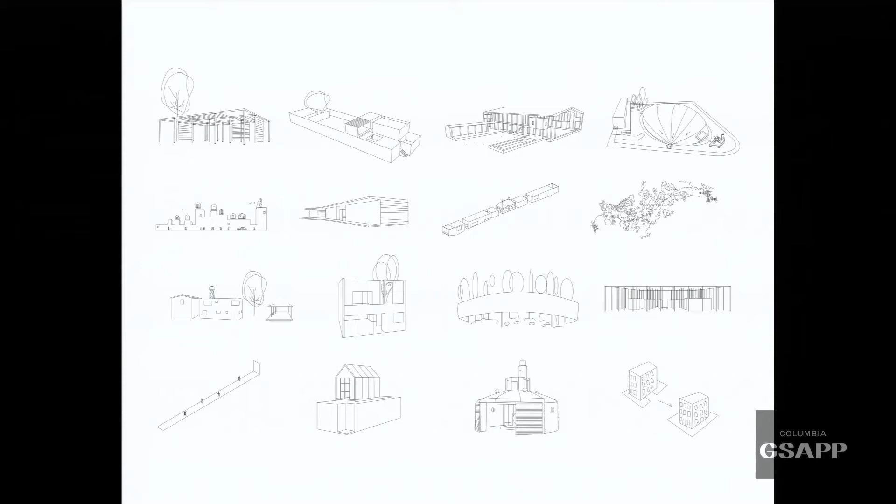Placemaking is not a product, but a process. By approaching design as a process, we seek our content in context. We make sure the species of spaces we build provide us a sense of wholesomeness and sensibility on every scale, whether they are public, private, industrial, or domestic.

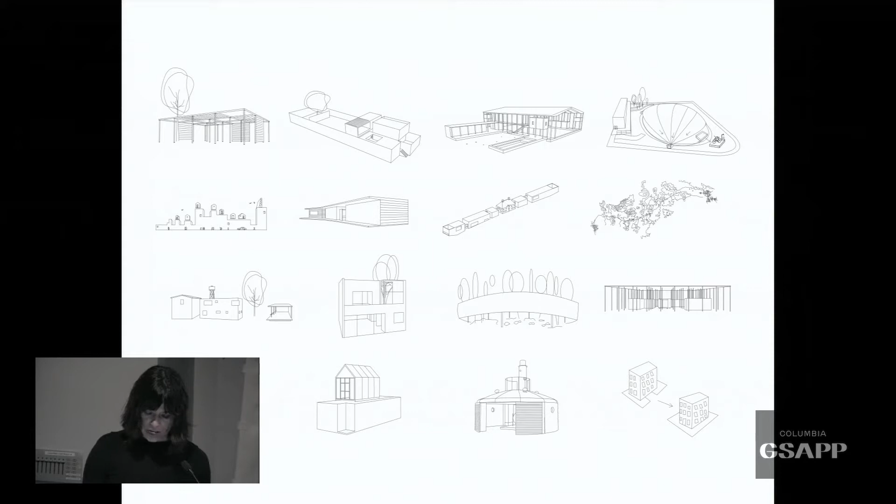There are three aspects in my design that contribute to placemaking: habitability, ecotone, cross-programming. Each of the 9 projects I'll present to you today merge in some measure all 3 aspects of placemaking, but some illustrate more clearly the specific features behind these concepts.

The first aspect of placemaking is habitability. Habitability is the capacity of space to welcome and engage people at the human scale in everyday routines. It is intimately linked to the atmospheres generated by choice and use of construction materials and design proportions. Habitability in design is what makes a space thoughtful.

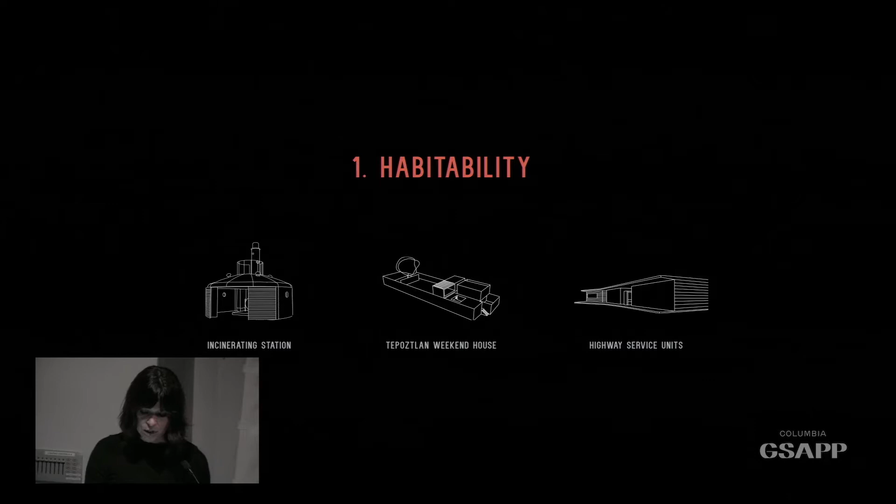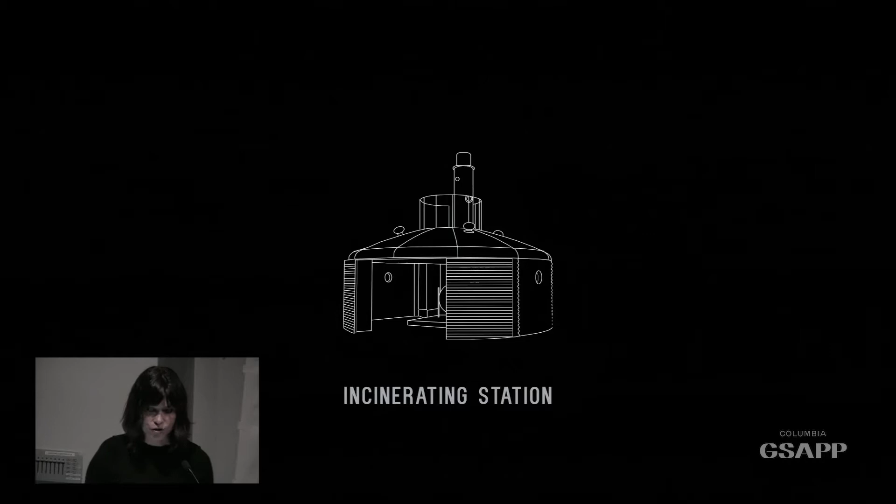For instance, we recently designed and built the incinerating stations, which houses the furnaces for solid waste combustion in Mexican national ports and airports. Our research for the prototype sought out the most functional form and construction material.

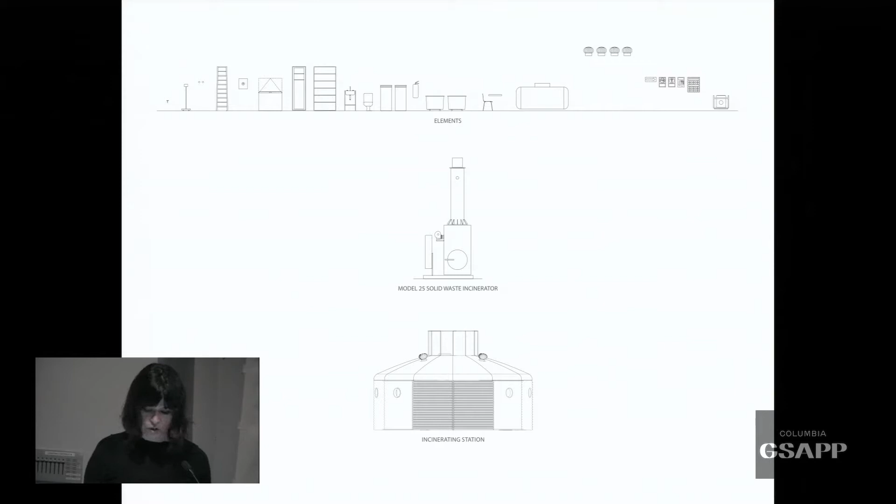So we drew all the elements that had to be inside the station, added the incinerating machine, and realized that a circular plan was the best way to do it. This enclosing spatial arrangement efficiently deployed the operator's program around the incinerating machine.

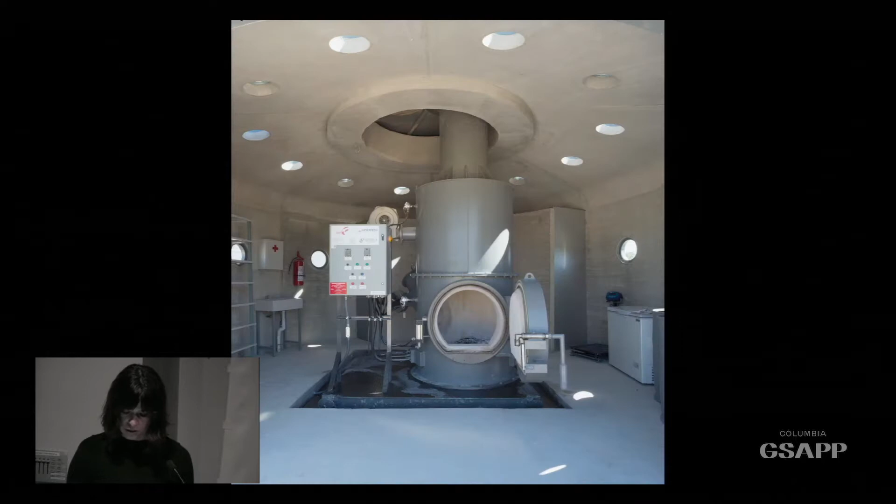Besides making tasks orderly, it radically transformed the way these facilities used to operate. Finding an adequate name for the project was integral to the conceptual design process. The term station evokes the replicability and tidiness of a space lab and the logistical movement around a train station.

We took into account corrosion, extreme temperature, security, exportability, and user comfort. The main challenge was that the client wanted ready-made parts, as in a prefabricated home, which would adapt to a wide range of climates: a jungle, a desert, an ocean.

The walls and roof of the station, in fact, can be set up in a couple of days. For this, we had to create a unique type of folded concrete that is durable, malleable, and requires nearly no maintenance. Although ready-made, the prototype was flexible enough to become adjusted and improved to different conditions.

The station becomes a habitable machine that in its round arrangement not only houses an agreeable workspace, but creates a meaningful relationship between the operator and his work. We have already built 10, and we're building 7 more.

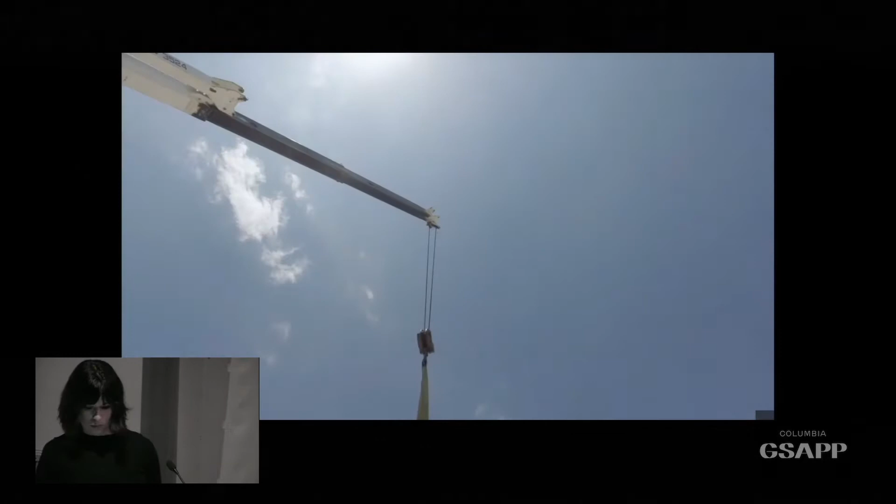So now I will show you a video about the construction process. I think there's no volume.

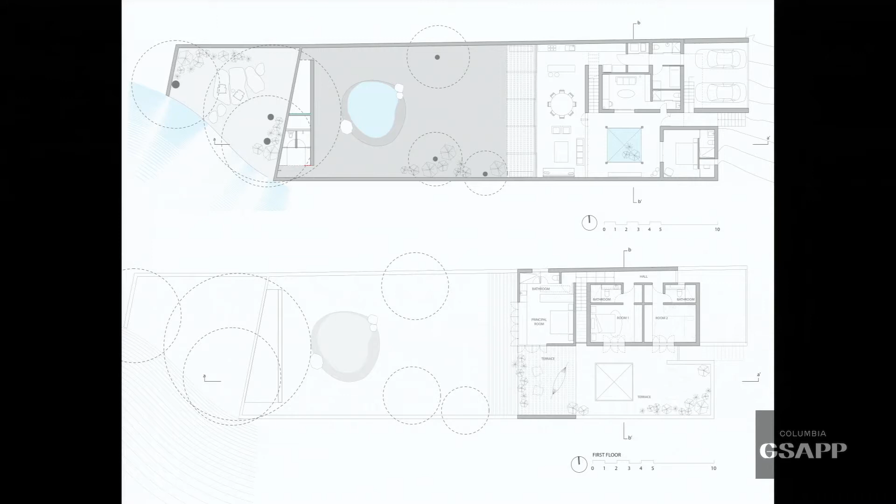This is the plan of the house. It's a 3,500 square foot house. It's in a very small terrain, but with a compact program, it has five rooms that you can inhabit.

So even if it's a small house, there's a lot of program in it. The main challenge was to give a sense of amplitude and variation in a rather small terrain, so that each space offers something singular.

The place can be experienced as a grand terrace with a luscious garden. The boundaries between open spaces and enclosures conflate in multiple fluctuations. The house subtly appeals to the user's perception. The emphasis is on hues and textures.

There's extraordinary craftsmanship in the use of materials. Its variety of atmospheres is achieved with different heights, using large windows and sliding doors that not only contrast narrow and expanded areas, but also allow the coexistence of interior and exterior spaces while maintaining visual depth.

Every element is manufactured to the scale and specific dimensions of the house: kitchen, bathrooms, closets, windows, railings, doors, vegetation. We design permanent furniture to the last detail and purchase some of the interior decoration. At times, you cannot really tell if you're inside or outside. Room divisions in different combinations transform space into one or the other.

Despite its austere design, the home's crafted blend of elements gives an air of fulfillment. All of the interior and exterior elements interweave in a harmonious whole that sustains a state of contemplation. The clients have felt at home in such a way that they're considering moving to their weekend house to inhabit it more permanently. So habitability is not solely about sheltering our daily habits, but also nourishing meaning and a pleasant state of well-being.

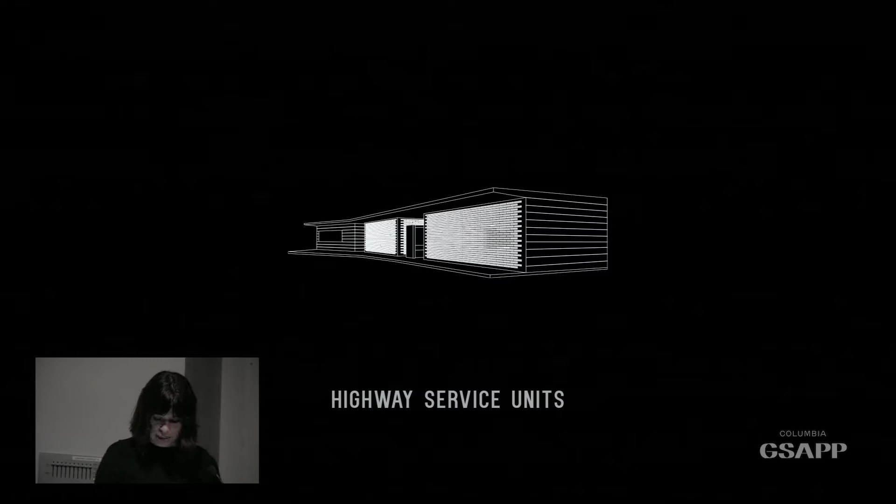The next and last project of the first theme of habitability is the highway service units. Habitability implies promoting a dignified use of space regardless of its function. But how do we achieve this with a public restroom? As you can imagine, it's particularly challenging to change the gruesome image people have of a restroom.

But in truth, this is a design problem. If public restrooms are cramped, dark, damp, and smelly, it's because they aren't given their due place. Our client asked for an exportable model of highway facility units that provided low-cost, sustainable public infrastructure along the Mexico-Morelia Road. Their program comprised restrooms, phone booths, and a convenience store. The main achievement of this project was transforming, through design, the negative perception users had of roadside services by offering safe, ventilated, pleasant resting areas integrated into the natural landscape.

The use of a frontal concrete lattice gave character to the facility units and made them noticeable to the traveler. The lattice efficiently cross-ventilated the restrooms, but also organically integrated the units into the landscape. To lower costs, our design approach experimented with different uses of one material. In this case, we resignified concrete to produce an attractive effect.

The use of light was also crucial. During the nighttime, the illuminated lattice creates a safe, warm, and welcoming atmosphere, and during daytime, an organic, clean resting site. The greatest achievement of the highway service units is that their simple and appealing design has made them sustainable and kept them in optimum conditions over time.

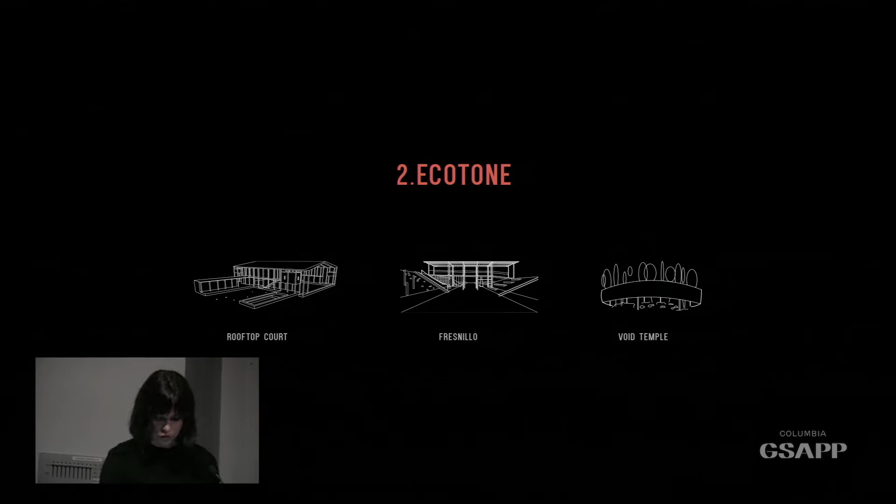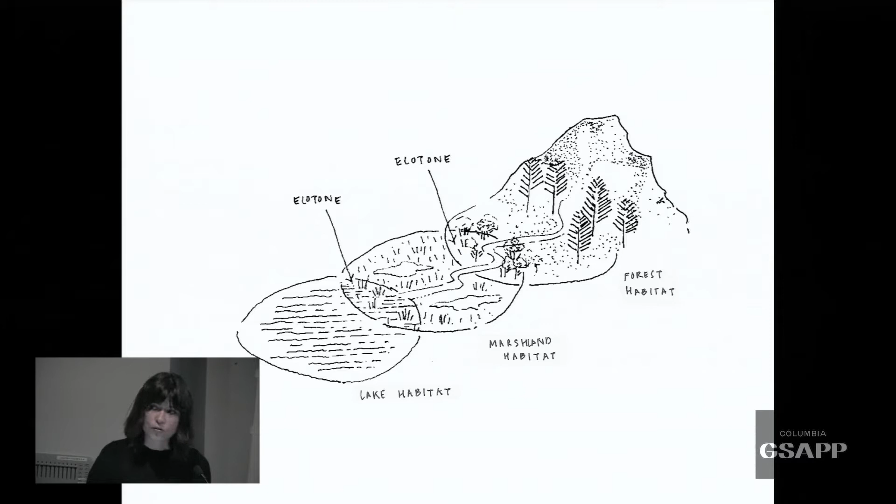The second aspect of placemaking is envisioning public space as an ecotone of cultural production. Biologically speaking, the ecotone is a transitional territory which modulates the tension arising between two distinct environments. In urban and architectural design, I understand the ecotone as a place that harmoniously merges the public and private sphere, tempers the move from open space to enclosures, and allows respectful coexistence of built-up and natural areas.

By activating public space effectively in housing blocks, we would be enabling a grassroots culture to emerge and shape community. But our greatest barrier has been convincing major stakeholders in the production of housing to invest in public space and social infrastructure.

In this suburban townhouse complex near the Gulf of Mexico, the developer asked our client, Infonavit, to build a rooftop to protect a basketball courtyard from the sun, heat, and rain. Realizing the lack of public space, we proposed instead a portico agora that fulfilled the program of a community center, using the exact same space and little more than the original budget.

The portico agora we designed created a new habitat through vegetation and expanded the user's program by way of height and intercolumn capacity. In between the columns, we inserted a multifunctional program comprising swings, hammocks, a library, computer room, restrooms, forum, and a playground.

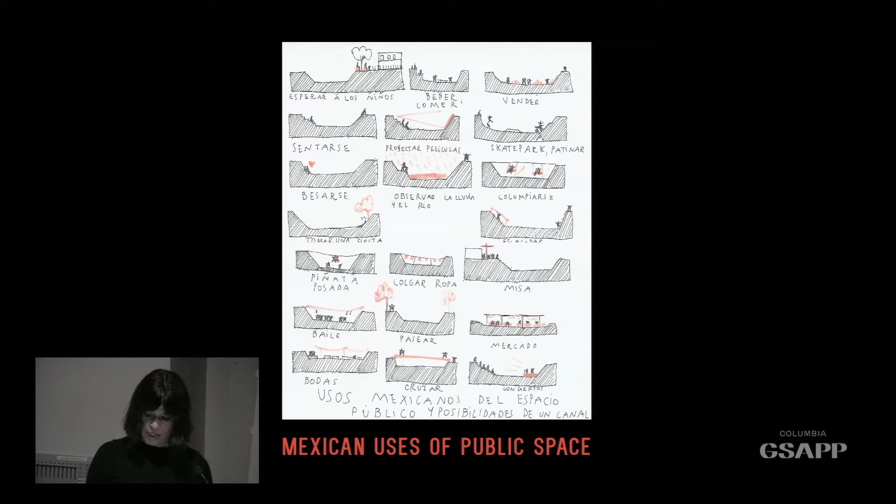Recycling and resignifying the extant infrastructure in the topography of a site is the best way to create an ecotone. Ecotones that result from recycling are great for placemaking because the cityscape becomes the program. This housing unit of 102 buildings, located on the hot, arid plains of Zacatecas in northern Mexico, is one of the most violence-ridden municipalities of the region, or maybe of the country.

The housing unit is constantly occupied by members of organized crime, protecting their territorial influence from other cartels. Besides the social scars inflicted upon the young people growing up in this unit setting, the housing complex had a visible urban scar.

A former open-air sewage canal had been paved, and what remained was a dry creek dividing the unit into two halves. Although the canal was a well-flanked, delimited space, it was fragmented, inaccessible to many people, and difficult to cross due to poor bridge infrastructure.

We observed that children like to slide in the rain gutters, and some teens and adults play football in a small area, but generally it was an unwelcoming place with no shade at all.

There were no trees in all this area, and it was always empty. It's a very dangerous place, with 102 buildings all painted in colors that are really aggressive.

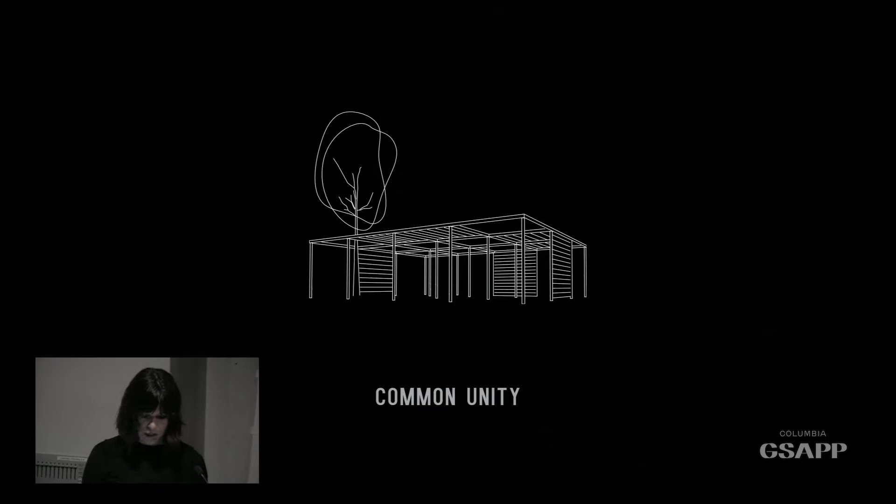Common Unity. In Mexico City, as I already mentioned, housing complexes are massive. 25% of the Mexican population lives in housing units; they are cities in their own right. Common Unity is an intervention we did in the San Pablo Xalpa housing unit, which has approximately 7,000 inhabitants and is located in the north part of Mexico City.

What we found was a housing unit where zoning and access had been altered through fences and barriers built by the inhabitants over time. Public space had been invaded for private uses, was underused, or simply nonexistent. One of our design strategies to reclaim privatized spaces for public use was to shift the vertical—railings, walls, gates, and closures, which separate and divide—for the horizontal—roof, shelter, floor—that connects, reunites, and encourages community interaction.

In Mexico, because of safety issues, both private property and public space are protected by railings, walls, and fences. This phenomenon is unjustified when protection becomes a barrier. When we first got to Xalpa, everything was gated. Every single square was privatized, and of course these barriers could not be touched. They fragmented the landscape into passageways and corridors that pushed social life out of common areas.

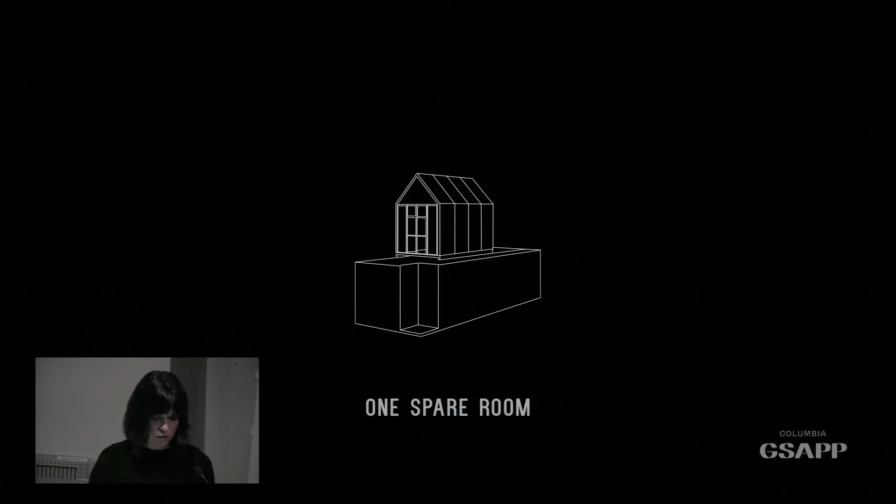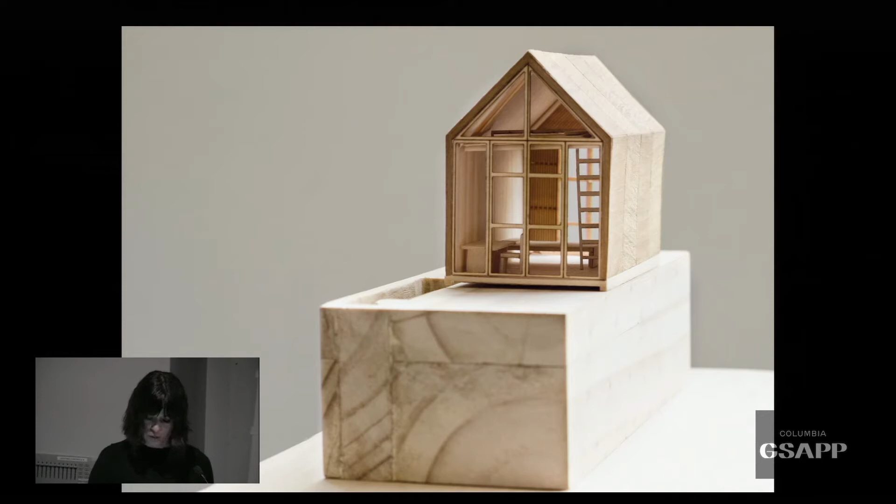With all this in mind, we designed and built a low-budget prototype spare room for townhouse rooftops in a very dense environment of social housing with houses of only one room. The spare room provides more privacy to the inhabitants and thus combats overcrowding and domestic violence with a budget of $4,000. Some neighbors are also building one more floor, as you can see here in the image.

Many times with no regulations and no design, so this becomes a big problem. Our prototype adds about 250 square feet to a home's living area, thanks to the exterior staircase that we have here and a loft height of the actual room.

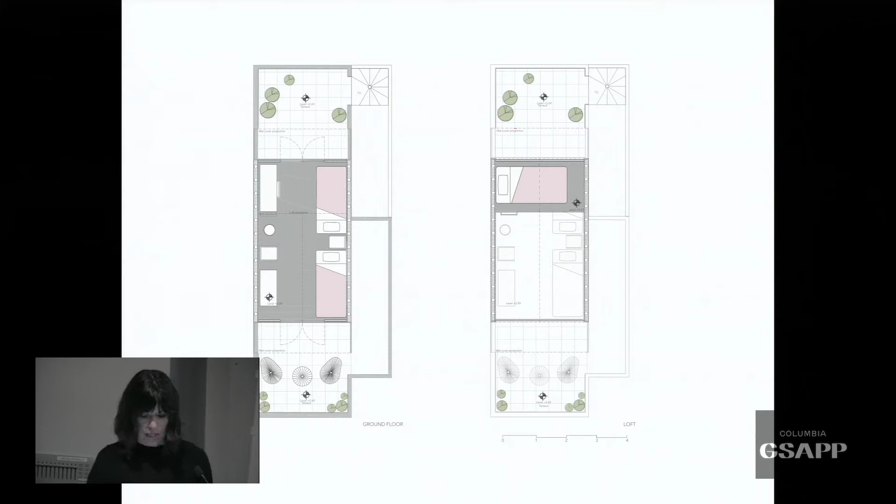The challenge of this project was to find a way to maximize space and not simply to subtract space from the ground floor. So we used the underused side patio in these homes. There is space for 5 or more people to sleep in the house in the new area that we built.

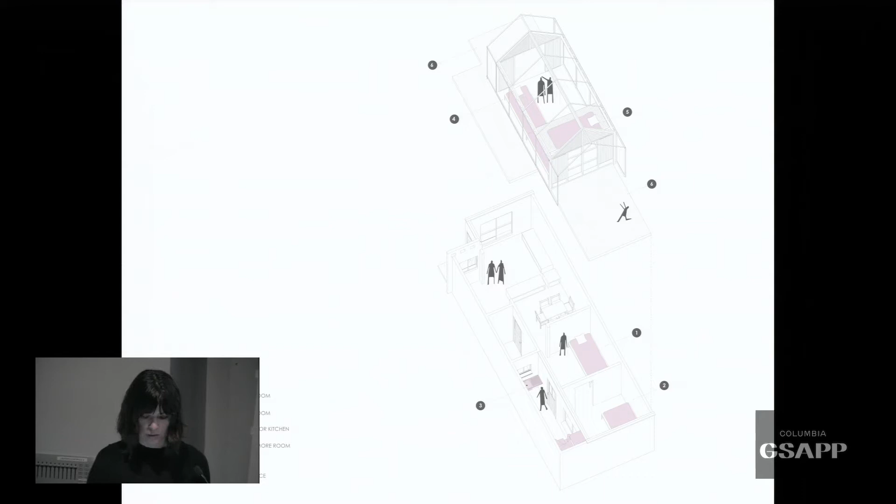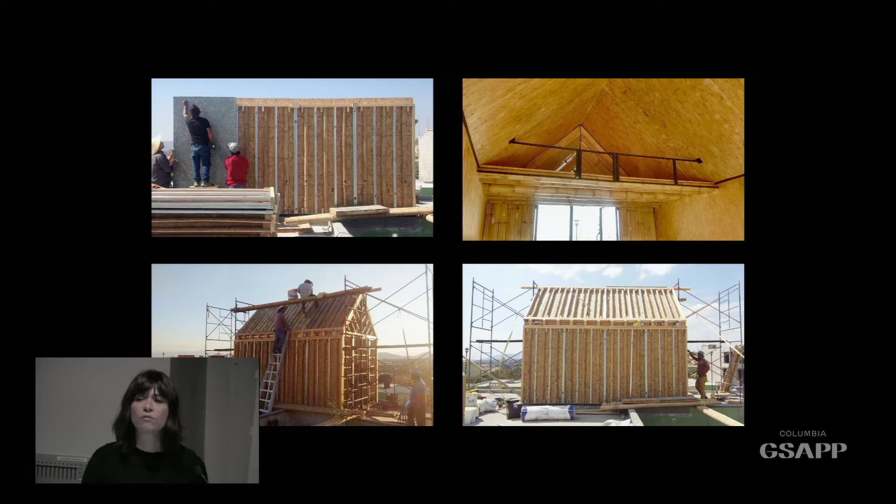Our spare room model tries to innovate and experiment with a biopanel, a bamboo, sustainable, attractive material, and with recycled insulating, non-flammable polyaluminum panels. The prototype was built under the One Spare Room program of Workers' National Housing Fund Institute, Infonavit.

The prototype, because of its height and cross-ventilation, has an incredible microclimate as it is located in Morelos in a very hot weather. It has become a playful place for kids, and it allows bottom-up microurbanism to adapt to household needs.

The type of placemaking that cross-programming allows through spare rooms in social housing units implies an accessible, viable, informal urban model for social diversity because it endorses efficient production practices that are not present in a sprawl urban arrangement, and it duplicates the land use at a low cost and promotes an accessible real estate market.

So this last project, called Urban Exchanger, is this project that I would like to show you that we have implemented in work with an international setting, since the vision of placemaking is exportable to other economical or social political realities.

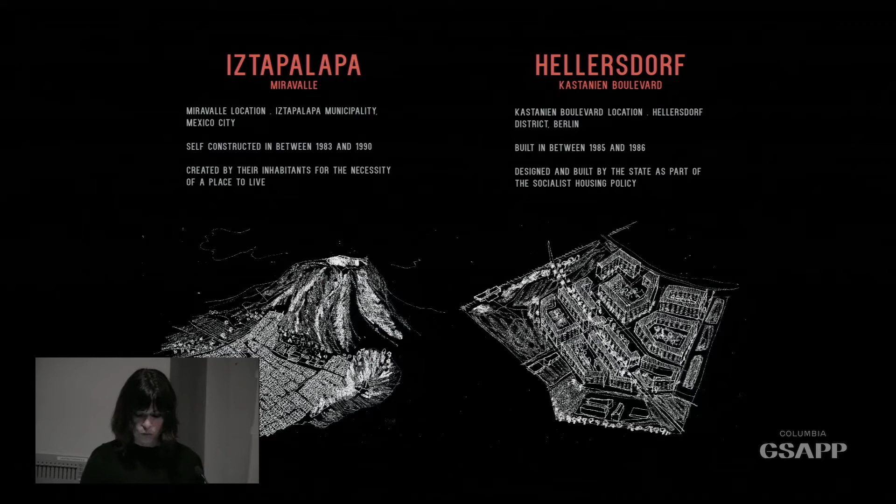From the standpoint of placemaking, cross-programming achieves efficient commercial exchange, but also facilitates information and knowledge exchange. In a collaboration funded by the Urban Exchanger program in Berlin, we teamed up with the SMAC Berlin studio to study solutions in tandem for 2 neighborhoods, both dormitory suburbs on the edge of their cities and both with a complex social fabric, Miravalle in Mexico City and Hellersdorf in Berlin.

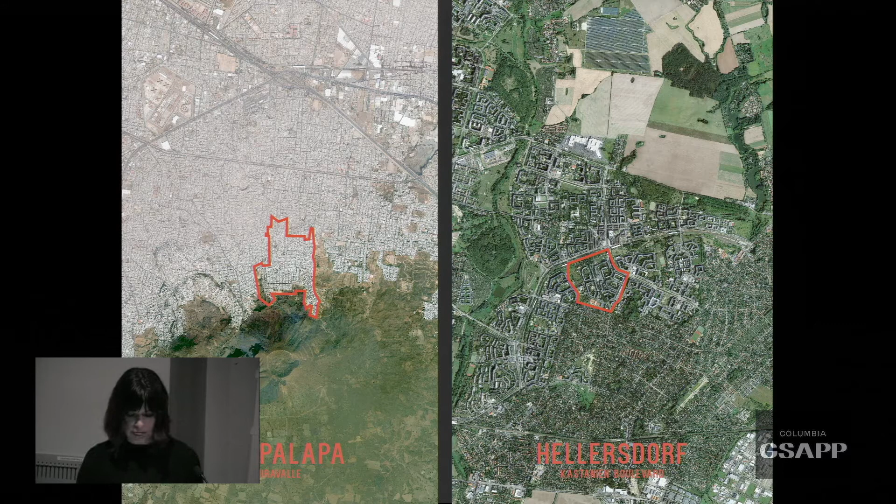This double reading opens the idea that small-scale projects can produce a ripple effect in the larger scale.

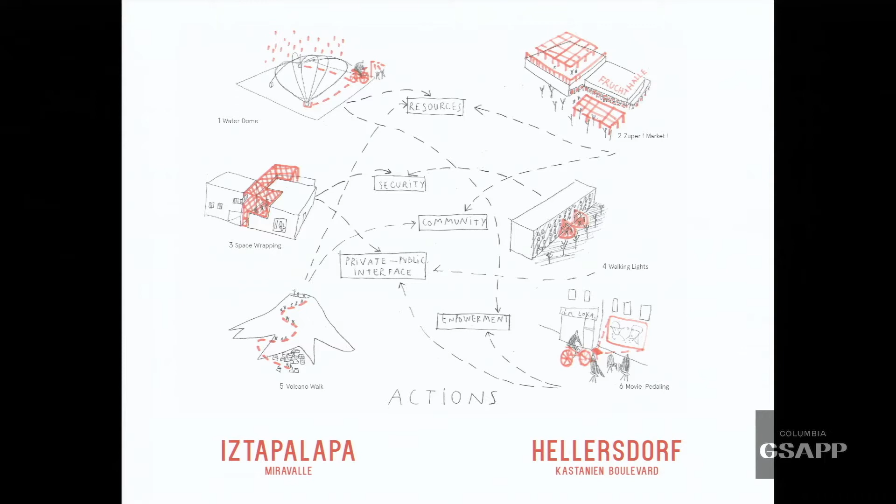We learn that going back to basics and understanding a site's own resources and essential needs can really make a change in the perception people have of their own place. In the case of Miravalle, it was water. In the case of Hellersdorf, it was light.

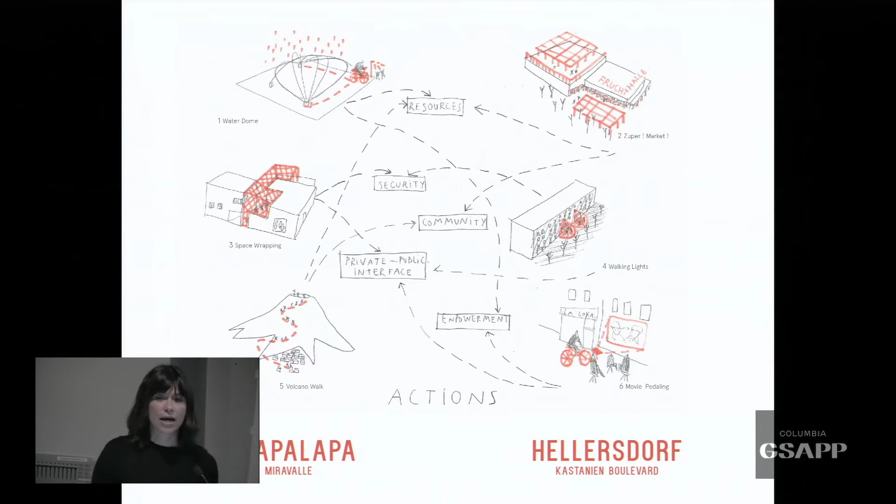Hellersdorf is a well-planned and maintained suburb which has sadly become known in the media as a socially unstable place, with permanent tension around immigrant and refugee centers due to far-right violent demonstrations promoted by residents. However, we also found many local initiatives with a social purpose present in the surroundings of the Kastanien Boulevard in Hellersdorf, Berlin.

Newcomers told us that women rarely left their quarters in order to avoid confrontation and provocations. We asked them what they required the most, and their answer was, we need a place where we can show our cultural values and offer all the goods our culture can give.

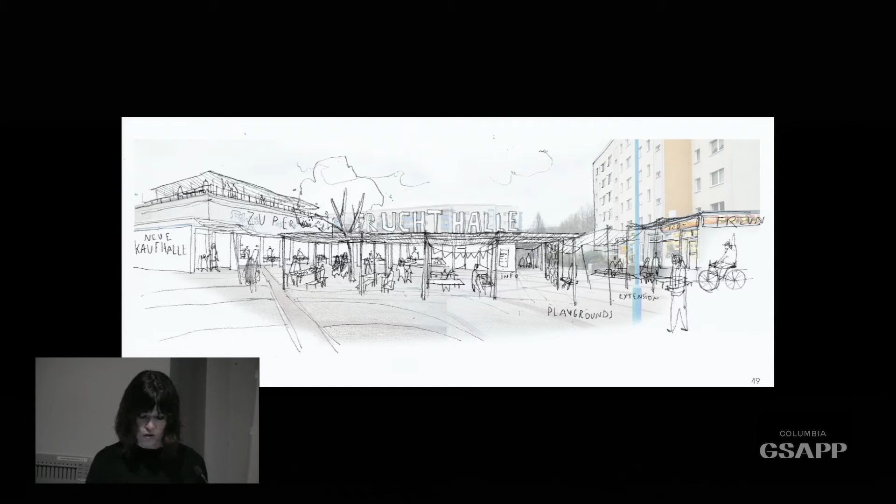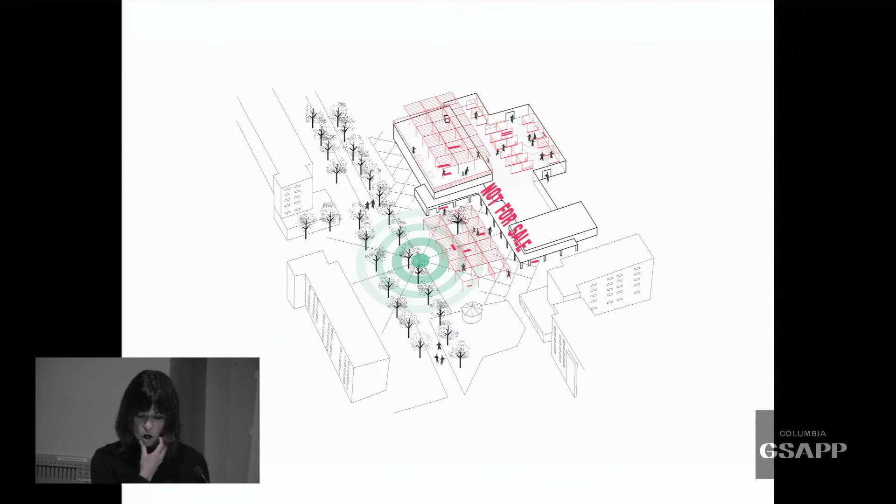Inspired by the more informal setting of the internet cafe run by the refugees, we designed an open space which allows cross-programming, activates common areas, and fosters social integration.

To develop a social district, Hellersdorf needs to reconnect people to the public realm. It would benefit from informality at a certain scale to engage community. A tactic would be to prototype temporary solutions that could gradually build spaces for diversity.

So Hellersdorf and Miravalle could both use a bit from each other. Miravalle, in this case, lessons of resilience, their lessons come from informality. It is a self-built unplanned settlement which nonetheless has a highly organized community. But it also has a huge problem of water supply, like the rest of Mexico City. It lacks a culture of water harvesting, unlike Berlin's water management.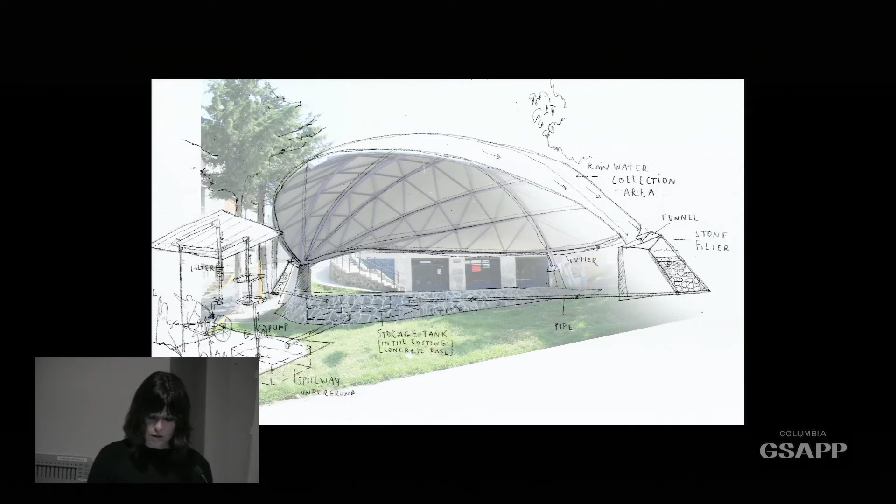This underused dome that was already there, we redesigned it as a water collector that became a pedagogical tool built and operated by the community that would detonate a water recycling awareness from the periphery inwards. Using a water public service installation as an instruction awareness center was a cross-programming at its best. The visible public intervention empowered and connected the people to their sense of responsibility in resource management.

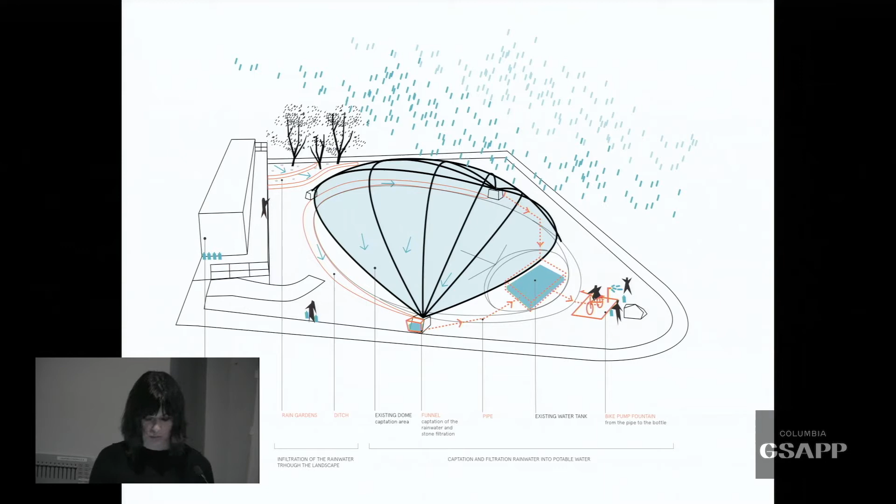Despite the community's proximity to the Guadalupe volcano, they had completely turned their back to the natural world. So the site action we planned invited the local people to take a walk up the volcano hill. The hike had an enormous social impact. For the first time, they said, the community looked at their homes from the volcano perspective. The irony of this fact could not be any greater, considering Miravalle literally means in Spanish, look at the valley.

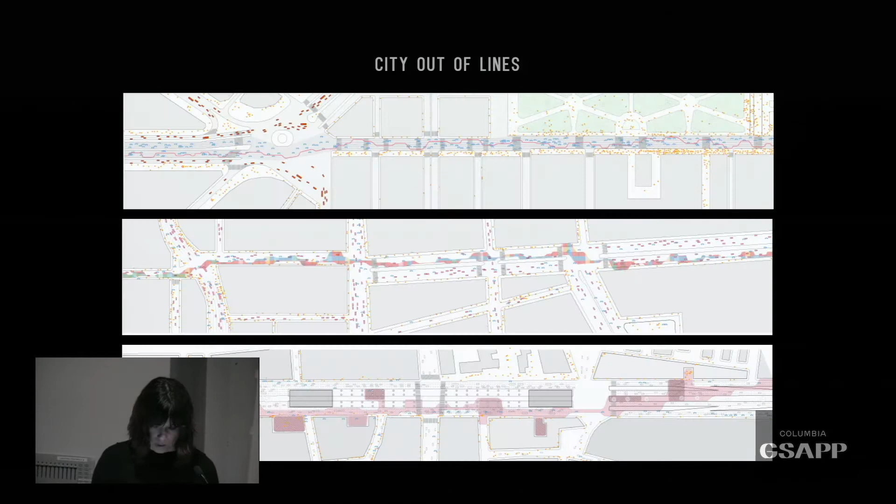So change begins with a shift of perception. To revitalize the under-dreamed spaces of a city, we work out ideas in real places in collaboration with real people. We model architecture's effect and reception. So this means going back to the basics of design.

To conclude, never underestimate the power of a line to redefine space. The line can transform a barren ground into a playground, empower the disenfranchised, connect a whole community along a string of lights, give shelter, project a temple. More than following a line of design, the challenge is to make the line a presence, a vector, a force. When we activate that force, we organize, mobilize, we generate change.

I've learned not to treat people as consumers of space, but as placemakers. People are the line that connect the dots. Be an insider of space. Interact, integrate, involve. Invest in placemaking.